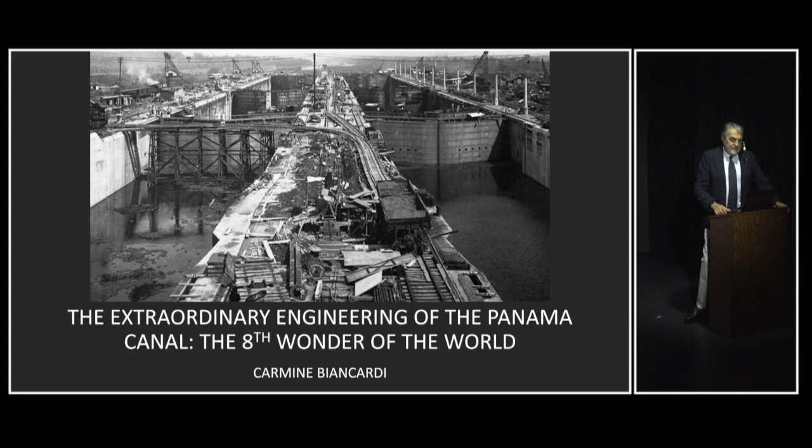Before getting inside this lecture, let me give you some of my thoughts on engineering, which is important to understand why we as human beings have been able to achieve so many constructions around the world, even arriving to the moon. Because with great engineering, everything is possible. This is one of the mottos for great engineers. However, we need a special engineering mindset.

We have to think in the system. This is one of the reasons why it was possible to make the canal. It's a system. It was not a straightforward approach to make the canal.

And there are three properties. The first one: you have to see the structure where there is nothing apparent. So you don't know, but you have to see the structure, how it's going to happen. And this is really something extremely difficult, so you need a lot of imagination. People don't think that engineers have imagination, but engineers need a lot of imagination to achieve it.

The second one is to adapt to the constraints. At the beginning you have some constraints, but during the ongoing of the project, different constraints come over, and you have to solve them, you have to overcome them. Otherwise, you never make it. The third one, you have trade-offs. You have to understand it, you have to be ready for the trade-offs.

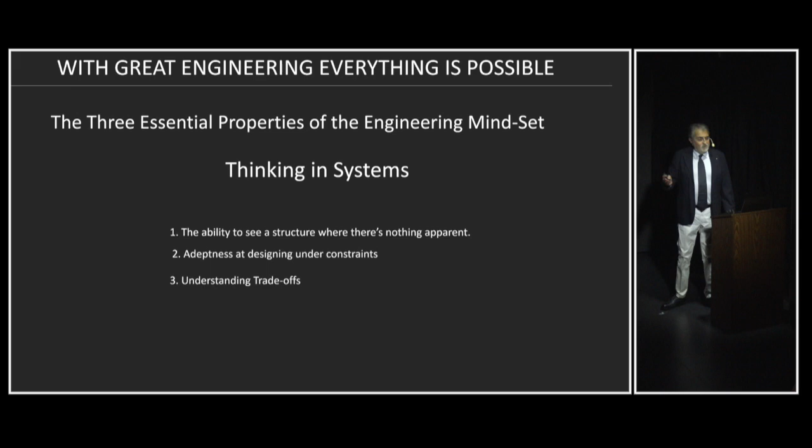And we will see how not straightforward was the engineering of the Panama Canal. This is the situation in Panama. But we'll be back there very soon.

As I told you yesterday, for those of you present, the key person here was the French, Ferdinand Lesseps. He was a diplomatic person, not an engineer. He made the Suez Canal. So he tried in 1880 to make also the Panama Canal as a sea-level canal.

This is one of the pictures taken by the technical commission of the French people. There is a reason why I'm talking about the French people, because with the effort of the French, the Americans could make it at the end of the day. This is something we have to recognize when we do huge engineering making.

This was in Limon Bay, that's where we'll be entering tomorrow, from Limon Bay in Panama. So at the end of the day, they failed after 8 years. They lost over 20,000 people and $250 million at that time. Actually, the company went bankrupt.

Just to remind you again, at that time President Theodore Roosevelt became President of the United States. His philosophy of the presidency was no wars, but I want to make the United States the most powerful country in the world. He was motivated and convinced that the Panama Canal would be the tool to achieve it.

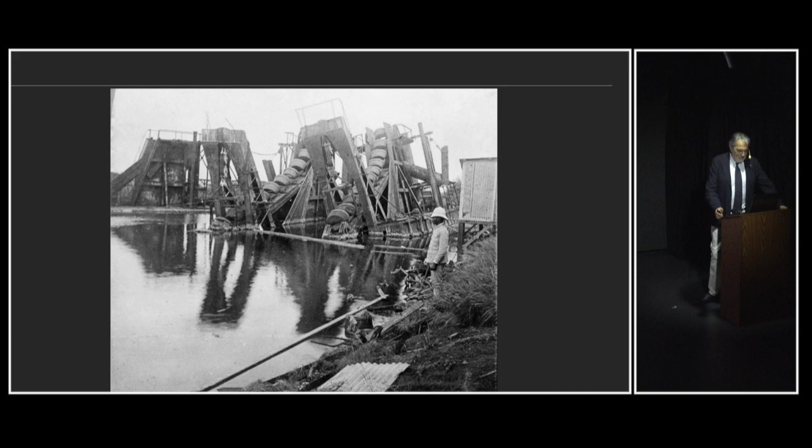So what he did, he asked his war secretary, Howard Taft, and his wife to go and convince Wallace to stay. So they took the ship and traveled to Panama, where they stayed with Wallace and his wife.

Practically, they figured out that the problem was not only engineering, but there were a number of challenges to be overcome. The first challenge was health. They had to control malaria because people were dying, and they were helped by the discovery by Major Ronald Ross that malaria was transmitted by mosquitoes. Remember, the French failed because they lost 20,000 people, as they did not know mosquitoes were transmitting malaria.

The second one was human resources. Who wanted to work in this hell, which was at that time the Panama Canal? Even the poor people who were there, they were dying, they didn't want to live there, they didn't want to work there. And they lived as second-class citizens, being paid with the silver roll, in this Jim Crow-like regime. Maybe some of you know what this used to be at the beginning of the last century - it was a sort of slavery. They had bad food, long hours, and low pay.

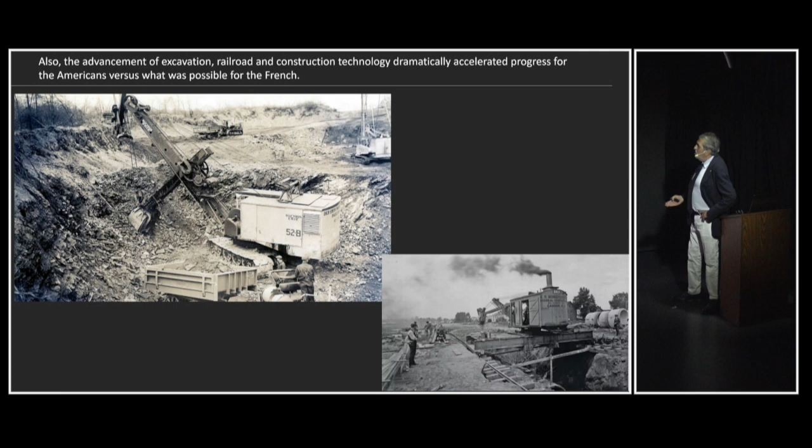There was a new era, because after 2 years, Stevens gave it up, realizing he could not achieve it—it was a big issue, very hard to achieve. From what I see in the history, President Roosevelt was cranky; he could not understand why Stevens resigned, because he was sure Stevens was the right person. So he decided to appoint Major George Washington Goethals, an engineer from the Army Corps of Engineers, to be sure that, belonging to the Army, he would keep the project going to the end. And that's what ended up happening.

You see how he reorganized the work. This is the total excavation from the Central Division. When he arrived in 1907, progress went up and then stayed steady until they neared completion. Before, they were advancing extremely slowly, so the target was always further into the future.

This is one of the meetings where they decided among 3 key projects. They started to talk about the options, and decided that a good approach would be the lock system. Why did they decide to go with the lock system?

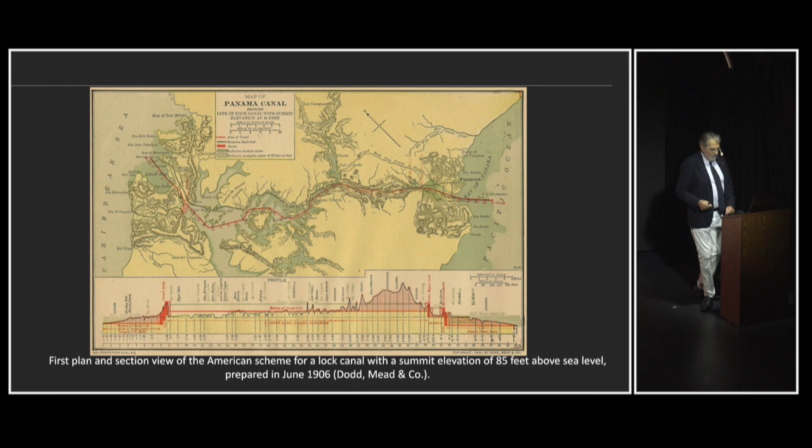So this was what was approved, and that's what was on the map. You see, there was the cross-section of the canal, and this was where you see the Culebra. There was the continental divide.

There were the difficulties, because if they wanted to build at sea level, you see how much had to be taken away. Today this could be done. Even the French could have done that if they had found another route. They were looking for the shortest route. Instead, they could go for the longer route and make it easier.

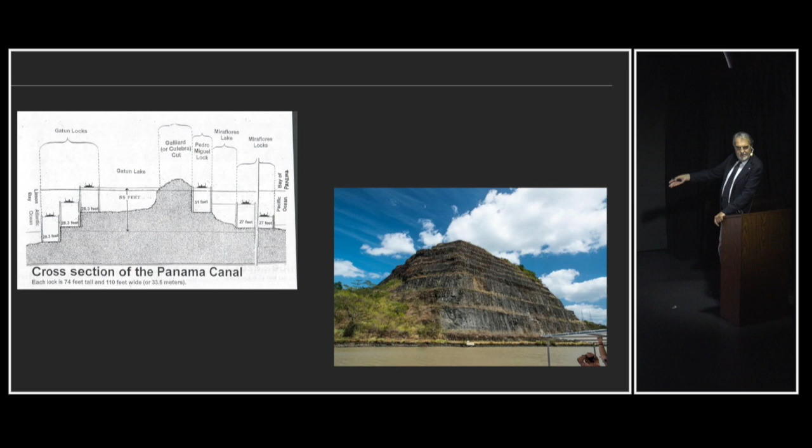And this is the remaining of the continental divide. So this is a different understanding of the situation, and that's the way it's been built. This is Panama City, on the Pacific area. That's Colón, on the Atlantic. So you see, 3 locks, the lake, another small lake. It's done.

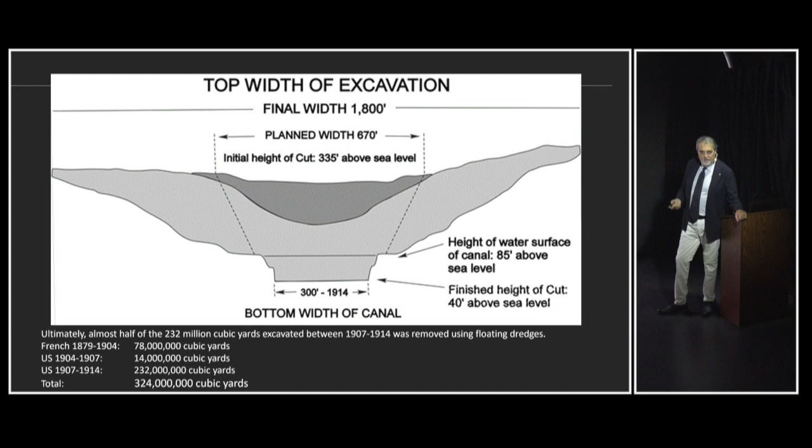This was all the excavation needed to achieve that. This gives an idea how much had to be excavated. The French only excavated 78 million cubic yards. Then, for 3 years, until Goethals arrived, they excavated only 14 million more. So we could say it was very slow advancing of the project. Then, with Goethals, they excavated 232 million cubic yards. So the total made 324 million cubic yards to realize that.

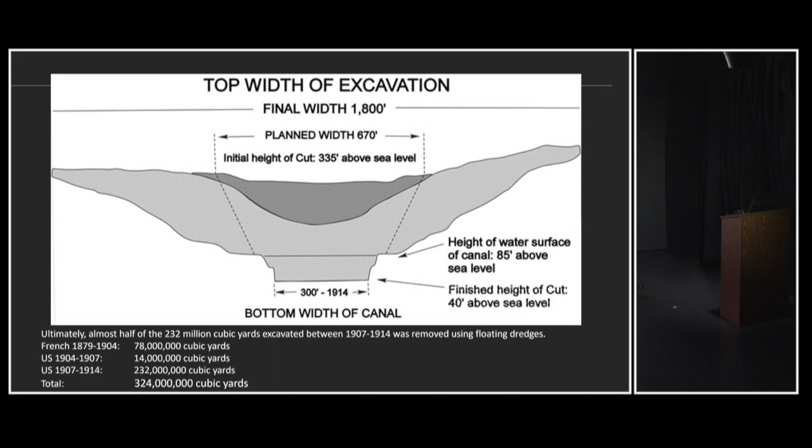So you see the height of the water surface of the canal became 85, which is the actual one. With the ship, you do less, but the maximum would be 85.

But how do canal locks work? Because we make it a canal lock, this was invented in 1490, the canal lock. Leonardo da Vinci — I don't understand why, nobody knows why, he had so many strange ideas, this guy — including the invention of the helicopter, but he did not have the engine.

He understood that by putting two doors at 45 degrees, it would simplify the movement, because now we understand physics, so we know that if you do that way, the pressure of the water is stable, the dynamic of the water, so it's very easy to control. With small power, you can move big, and you can stop the water. This was the original design of Leonardo da Vinci.

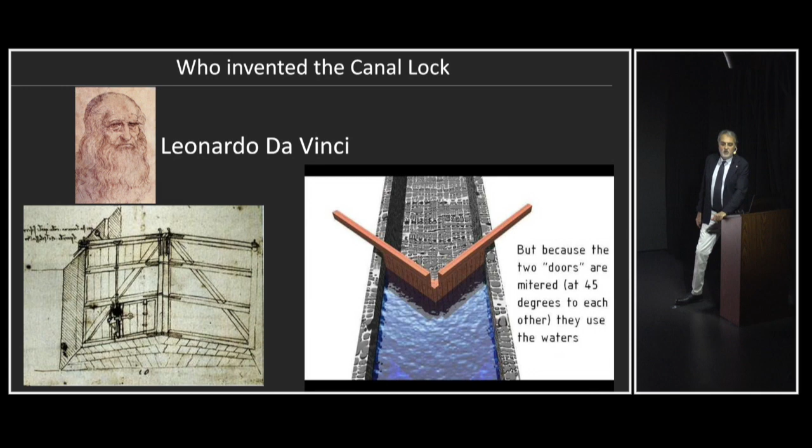Actually, he made one, in 1497, in Milan, which is still there. Now, of course, it's with motors, electrical motors. So he realized that, and the engineers at that time had to use his technology to make the locks.

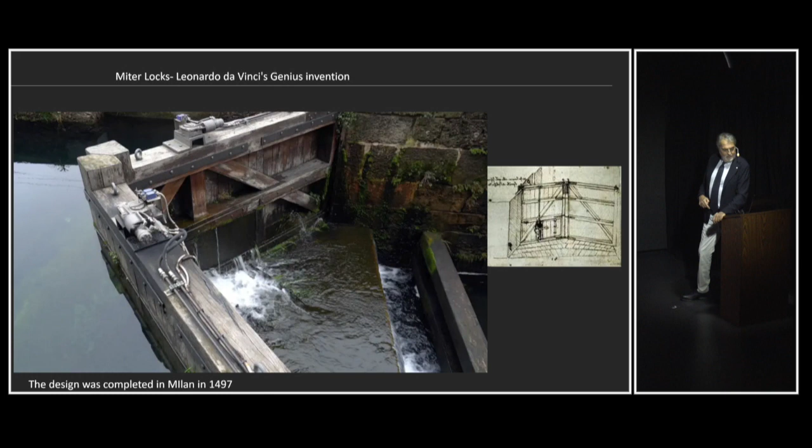And if you see from the physics, it's very simple. You share the pressure. You have to create these two angles to avoid the water flowing from one side to the other side. With this, very simple, you can make a lock. But the lock is huge.

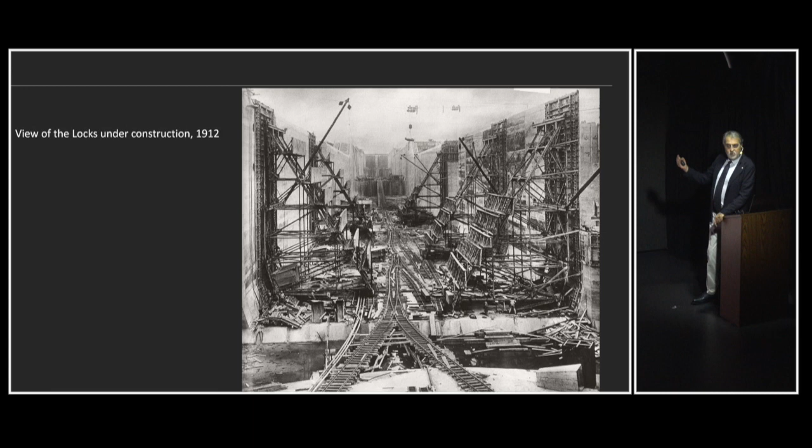This is one of the locks under construction in 1912. Imagine if they could not use this genius invention of Leonardo da Vinci — they would have to make another sort of door that would use a lot of energy to achieve it. This gives you the idea of the size of the lock compared with one of the silver roll workers who was working over there at that time.

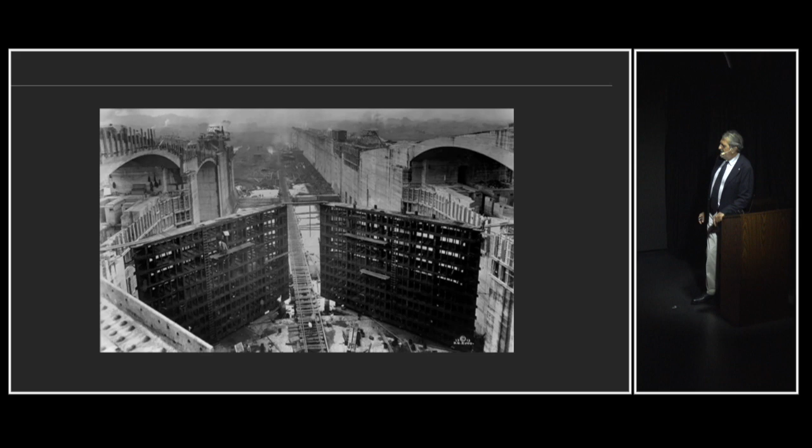And this is the engineering of one of the locks. It was really a huge effort.

So you see, it's not a straightforward project. It's not something where you just say 'I want to build this ship.' Okay, we make the concept, we make the design, then we talk with the client, we make a modification, we go to the shipyard, we build, we deliver. No, it was not like that.

Not at all. They were changing every day, the chief engineers would sit down with the engineers, okay, now we have this, how we do that, change it, make it. That's what they did. At the end, the system works like this.

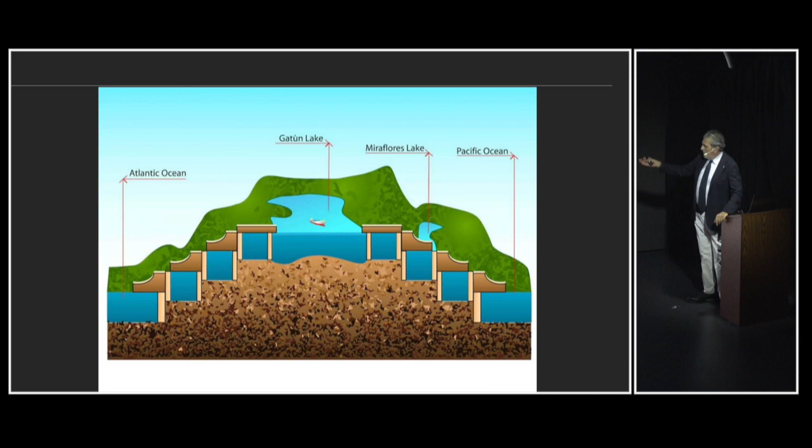You go up and you go down. This is part of the excavation.

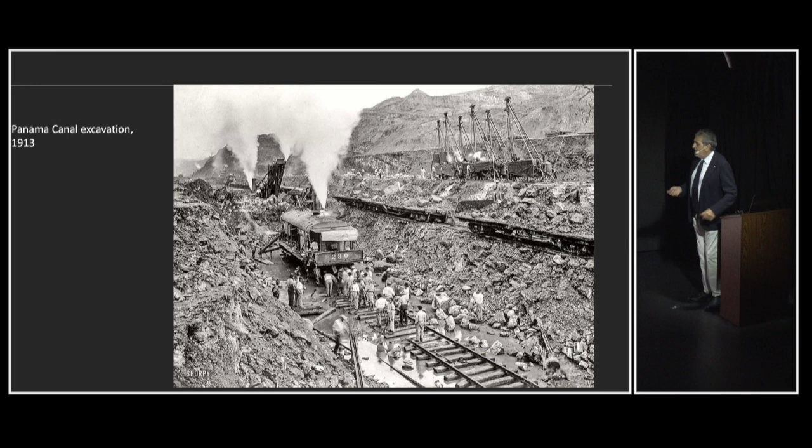And you have to remark how poor the conditions were for the people working there. And the risk - you can imagine here, you could have a sliding of the mud on them. That's what usually could happen during the work.

And look where the houses of the gold roll people were, over there, living over there.

And this, what I was telling you, was a landslide during the cut. So everything was destroyed. We don't have any statistics on how many people died during this accident.

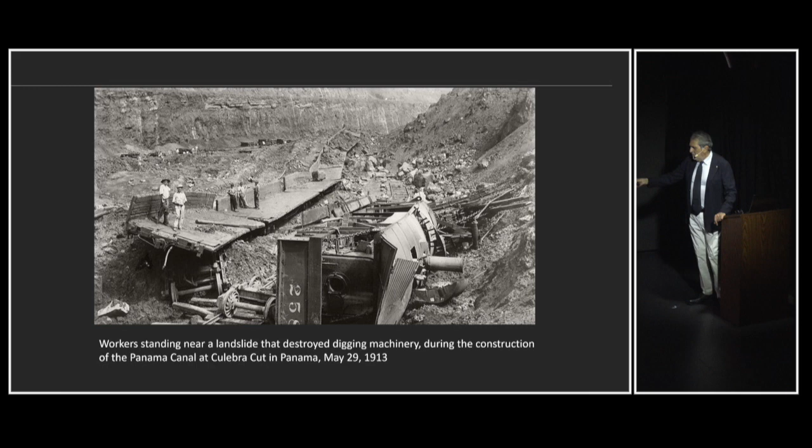Over there, I was only a little bit more than a year before the opening of the canal at that time.

Now, how did they make the lake? Okay, let me see if I can show you.

You see, this was the lock. You see the small canal, the French, was written French - this was the part which was excavated by the French. But they went in a different direction, and they made the lock at this part, and they made the dam here to create the lake.

So this was the project which was modified during the construction of the canal. The French made a small canal at that time.

This was the visit of President Roosevelt, who enjoyed taking pictures on the machine, like he was a worker.

And how they had to work there, they had to use dynamite to do that, because there were big things to be done.

This is a small movie: a little job connecting the Atlantic and Pacific. A little job. And the other people were observing from the dam.

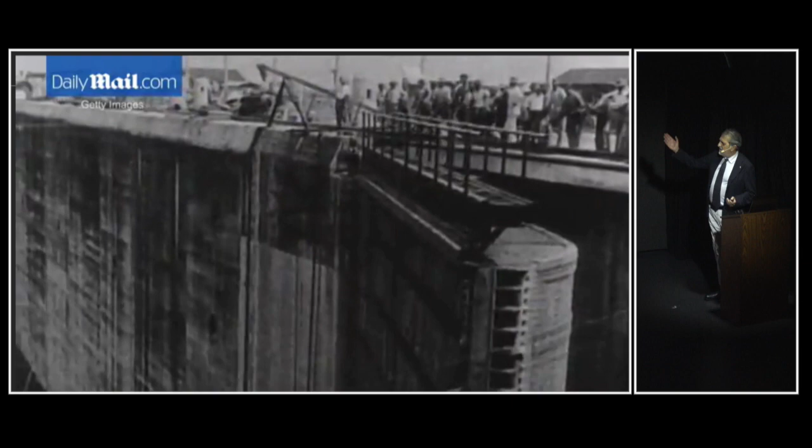So let's go back to the picture from before. So they were on the cut, they were working, and finally they were able to make the cut.

That's where the old canal is, which is still there. And the first water was flowing inside this area, which is the Culebra Cut, the area which goes from Lake Gatun going to the locks on the Pacific side.

This is just a few months before the opening of the canal, and you see how the water is filling up in the canal. It's clear to understand how much water is needed for operating the Panama Canal - a lot of water. That's one of the reasons they also built the lakes, for this particular reason.

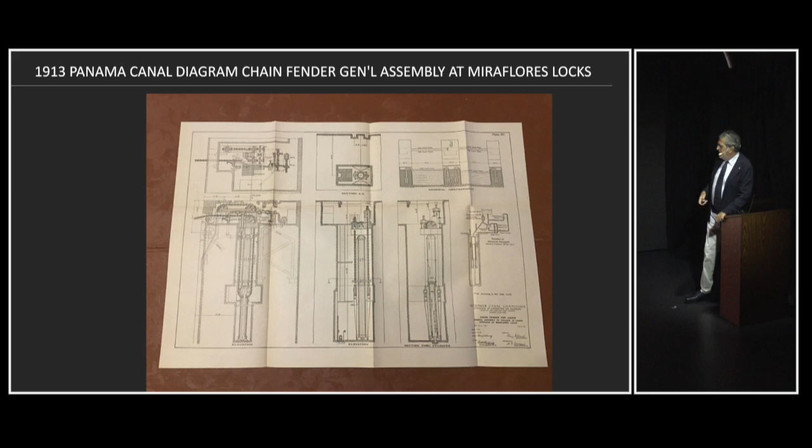Now, these are some of the diagrams of the Miraflores locks, which are on the Pacific side. We are not going to transit this one. So these were detailed designs, and there are things which clearly show what happened.

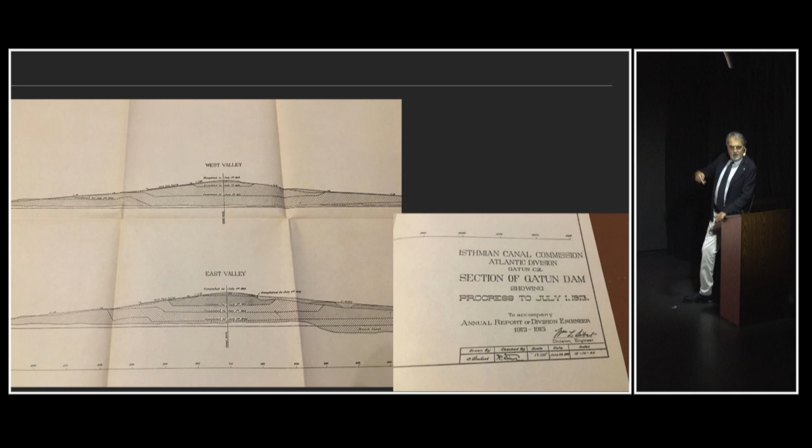This is the cut of the Gatun Dam. This was the design of the Gatun Dam, and this is the making of the dam. Of course, when they made the dam, they also realized the power generation station at the same time, which is still in operation - it's generating all the power they need.

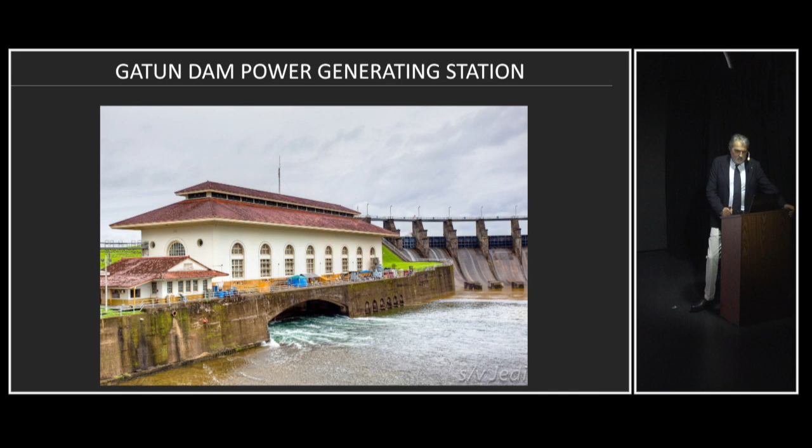Of course, you know that until 1999 the Panama Canal was US territory, and then it became independent with the new treaty. So, with all this complicated, not straightforward strategy for the engineering of the Panama Canal, on August 15, 1914, the first cargo crossed the canal.

However, that same month, the First World War started. So there was a small ceremony with the local people, but not the official opening of the canal, which meant President Wilson did not travel to the Panama Canal because he was busy with the war. The ceremony was postponed until 1920.

This is the first ship, the Ancon, a US steamer, which was entering the canal, crossing the canal. It caused, and there was the loss, which was counted at the time, of 5,609 people.

This is how the canal locks work, and that's what we are going to do tomorrow. We'll be doing these first three, stay in the canal, go around and go back. This is the way to go into the canal.

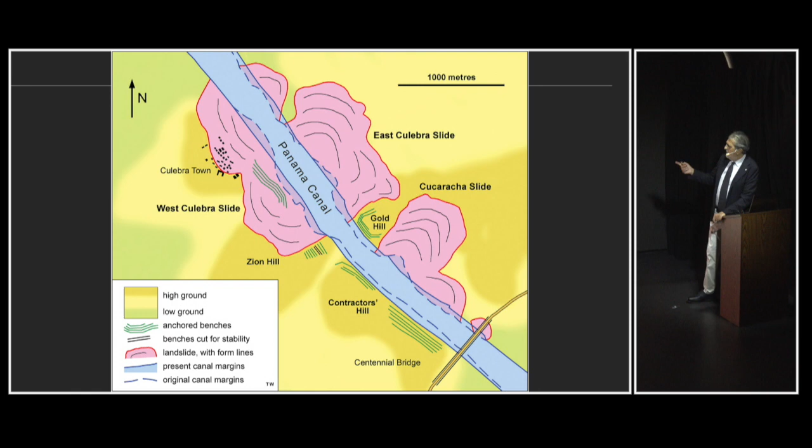And this is what happened. They had to enlarge the famous Culebra Cut to permit the passage, the crossing of larger ships. And you see here what happened.

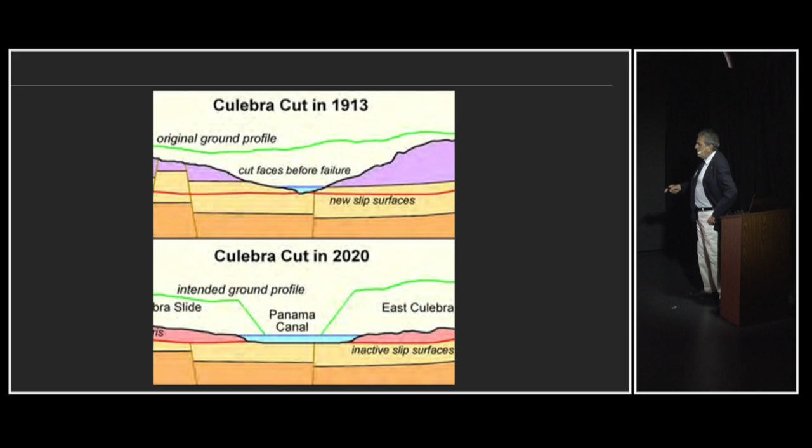This was the first Culebra Cut they did. This is the one they finished in 2020. On the graphic it looks small, but it was quite a huge achievement, excavating the Culebra Cut to permit the passage of larger ships.

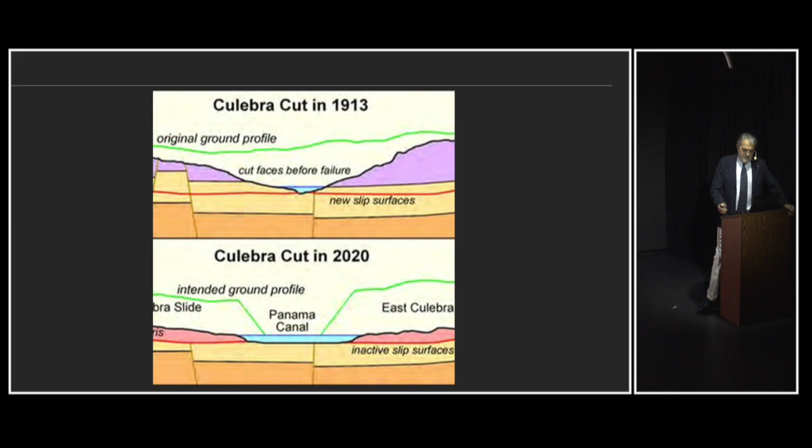To give you an idea how big these ships are, there were the famous Panamax ships. The Panamax were at maximum 1,000 feet long, and they had a beam of 110 feet.

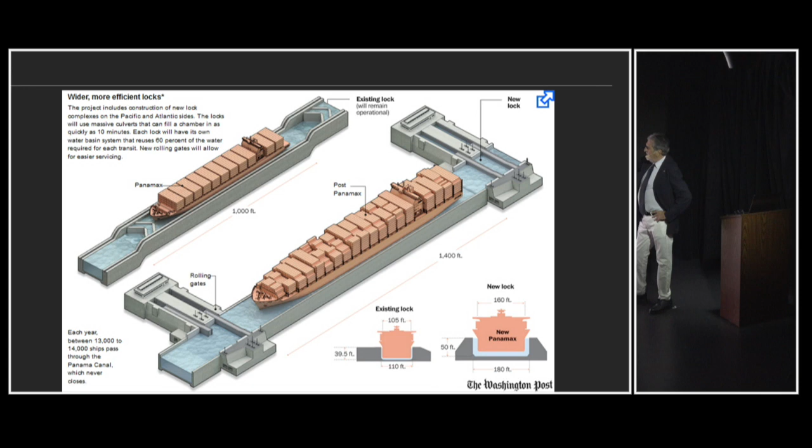Now with the new locks, which you will see tomorrow, I believe on our left, you can have a ship of 1,400 feet long and a beam of 160 feet, which makes a huge difference in the size of the ship.

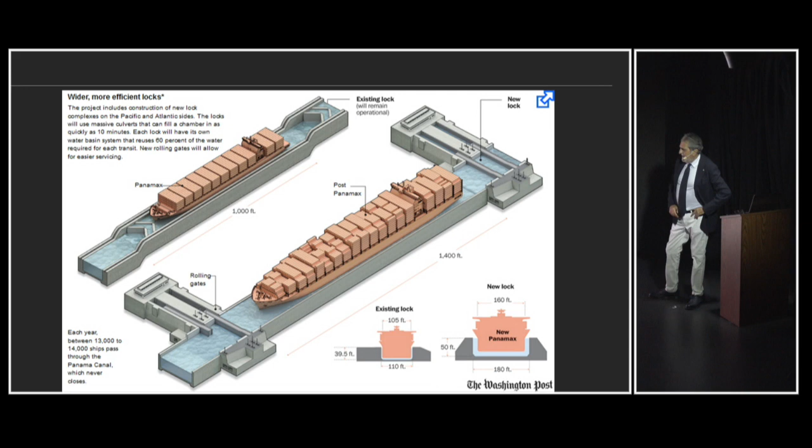And to give you an idea, before they could get ships with 5,000 containers, and now they get ships with 12,000 containers. So in terms of increasing the transit of containers, it's quite important.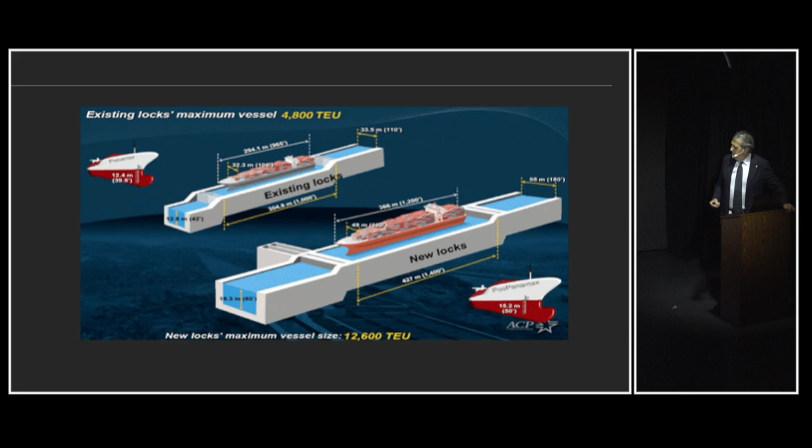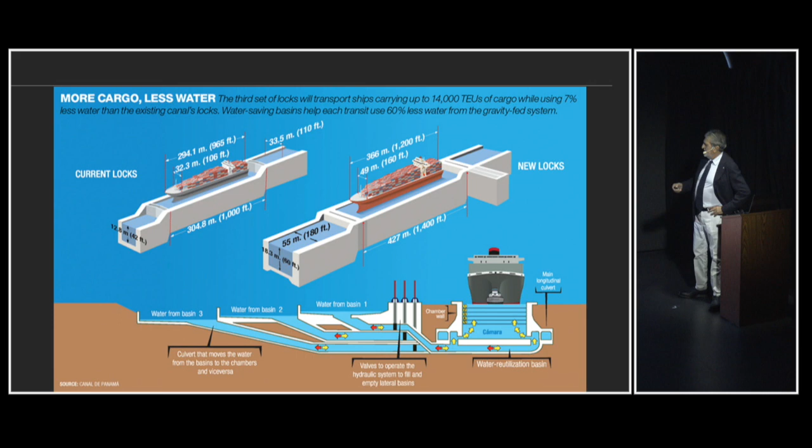And this is, we'll be crossing the existing locks, and this is the new locks. This is a similar design, but I'll give you the situation with the water basin.

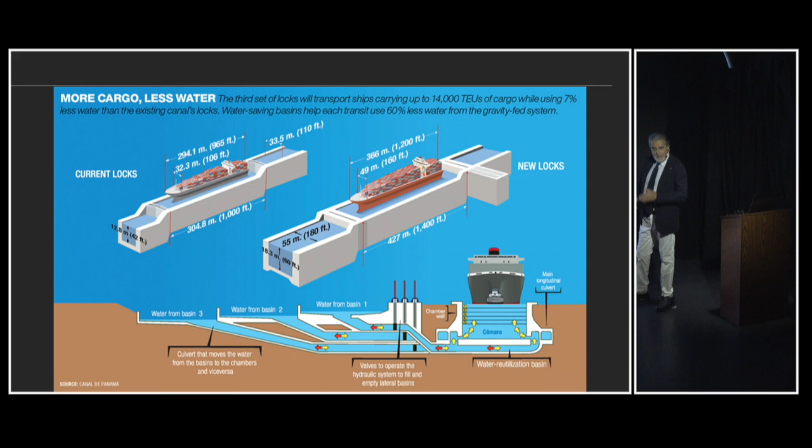There you need a lot of water, which is recovered every time the tank empties and fills, the water is reconverted in the water basin. So they need excellent water management to keep the canal running all the time.

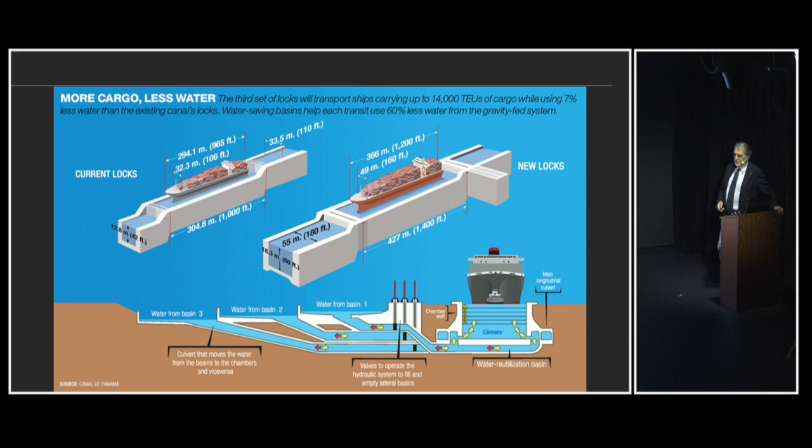And this is the project. Now this has been made, and you see the existing canal and the new locks with the tanks. So it's been a big change.

Now, when engineering touches everything which is in nature, we never know exactly what's going to happen. We can make a hypothesis, we can decide a sort of strategy, but we are never sure how nature is going to react.

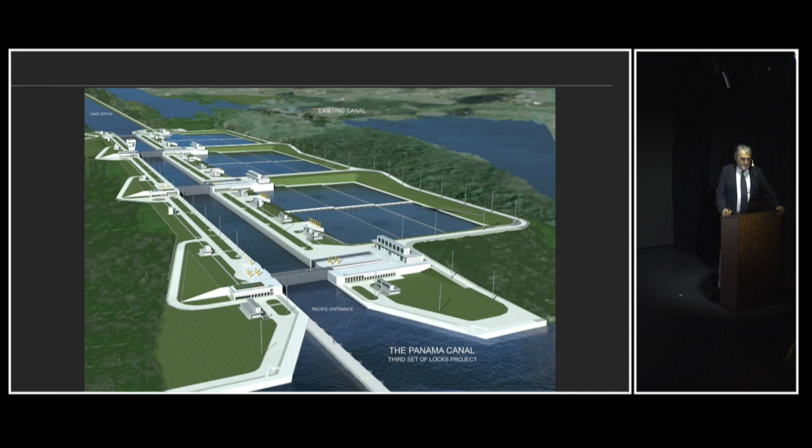So at the end of the day, this is the situation where you see the two locks, the new and the old. The Gaillard Cut is also known as the Culebra Cut - they have two names.

One important thing: usually you think you're going from east to west. That's not true. The canal runs north to south, geographically, or south to north. The operators know this because their route goes south. But we as normal human beings believe you cross straight across. We don't. We cross like a small diagonal going down.

Now, what would have happened if the French had completed the canal? As I told you, the French had superior technology before the Americans because they achieved the Suez Canal. But for some reason, Mr. Lesseps, the French leader, was not an engineer, yet he wanted to decide everything, and he liked being close to people in power. He wanted the shortest route to cross. If he'd taken a longer route, it would have been much easier to make a sea level canal. From an engineering standpoint, a sea level canal would be much easier to handle and manage, because naturally you'd get water coming from the two seas. To enlarge it would be much easier—you just enlarge it and the water comes in. The system with locks, dams, and lakes is an over-complicated situation for an engineering project. They failed because they didn't want to be engineers, they wanted to be political. That's where they made the mistake.

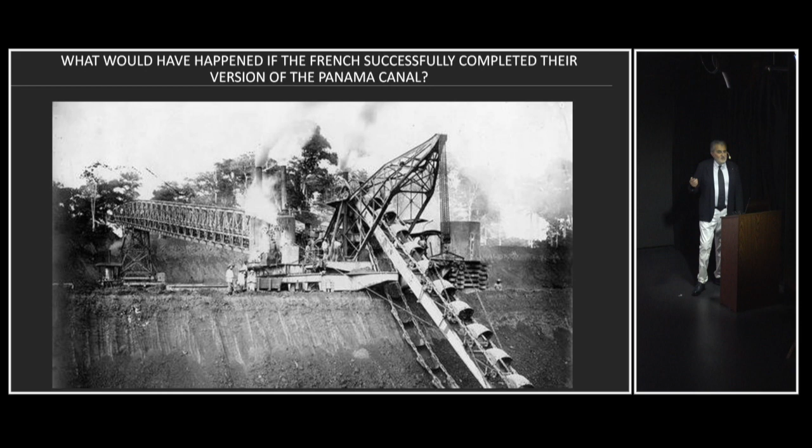So what is the epilogue of this? America succeeded where France had failed. As I told you yesterday, they built it with the philosophy of Theodore Roosevelt. At that time America became the most powerful country in the world because they controlled trade between the two other continents. But without the failure of the French, America might have also failed, because they learned from the mistakes, which is typical in engineering.

For example, in engineering we take from aviation: you fly, you crash, you fly. Meaning you do something, you make a mistake, you understand from the mistake, you fix it, and you fly again. This is exactly what we do in engineering—we cannot do projects straightforward. The success of Goethals was influenced by the failure of Stevens, the third one. But Stevens' success had been influenced by the failures of Wallace. And Wallace's success was influenced by the failures of the French. So everything is always interconnected.

So we can say that with this ingenious engineering triumph, the Panama Canal is an unparalleled conquest of nature. Indeed, the Society of Civil Engineers lists 7 wonders of the modern world, and they call the Panama Canal the 7th. The others are the Channel Tunnel between England and France, the CN Tower in Toronto, the Empire State Building, the Golden Gate Bridge, and the Itaipu Dam between Brazil and Paraguay, with the 7th being the Panama Canal.